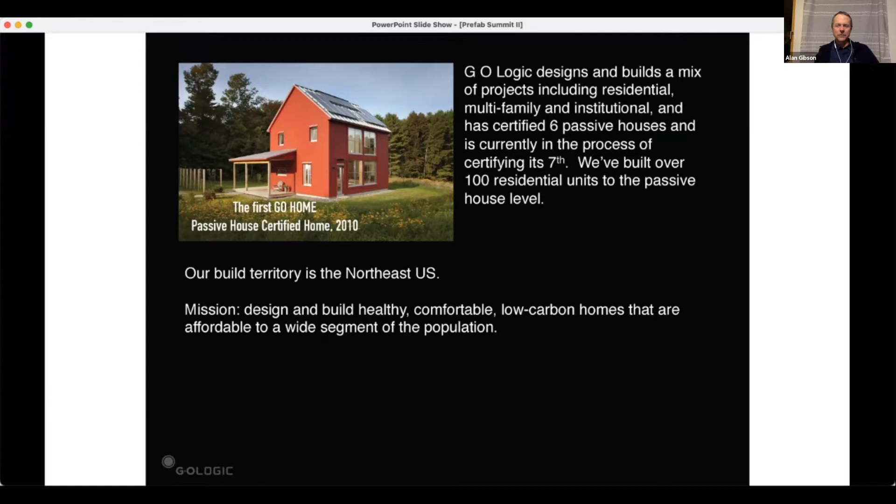I'm Alan Gibson. I'm owner of GO Logic LLC. We're a 25-person design build company based in Maine. Next slide, please. I'm going to go pretty quick, Zach. I don't have much time. So we've been around for a while. This is our first house, the GO Home, back in 2010. That was Passive House certified. And we started our business at that time and basically founded it on doing all Passive House all the time. Our build territory is the Northeast US. We are general contractors. So in Southern Maine, we will general contract projects. Outside of that area, we will design and then deliver a shell package for others to finish.

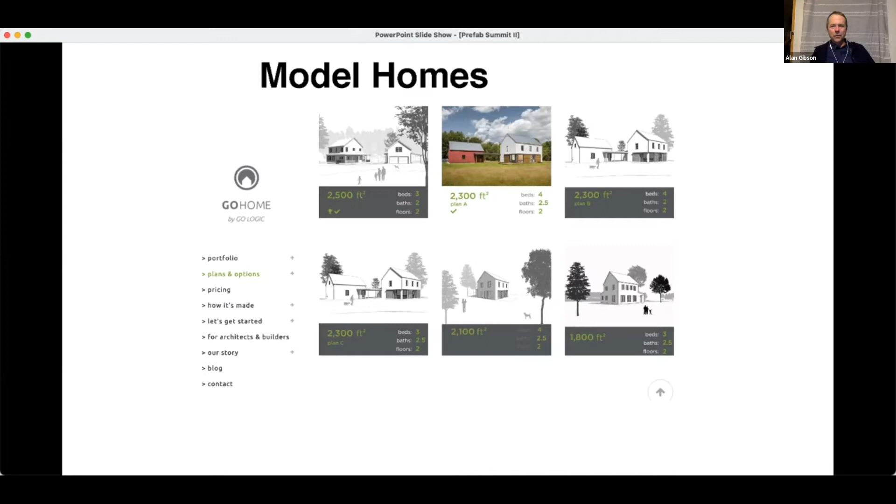Our mission is to design and build healthy, comfortable, low carbon homes that are affordable to a wide segment of the population. Next, please. I'm not going to claim that we're an affordable home builder. We do a mix of projects. We do some higher end custom homes. We've done some institutional work, but our bread and butter is single family homes. Next, please. And to try to crack some of the affordability nut for Passive House, we developed the GO Home, which is a series of pre-designed homes. Next, please. With models ranging from 600 to 2,500 square feet. We've built most of these multiple times. The design process is much more streamlined because they're pre-designed and we allow some customizations, but it allows the whole process to be more streamlined and therefore less expensive.

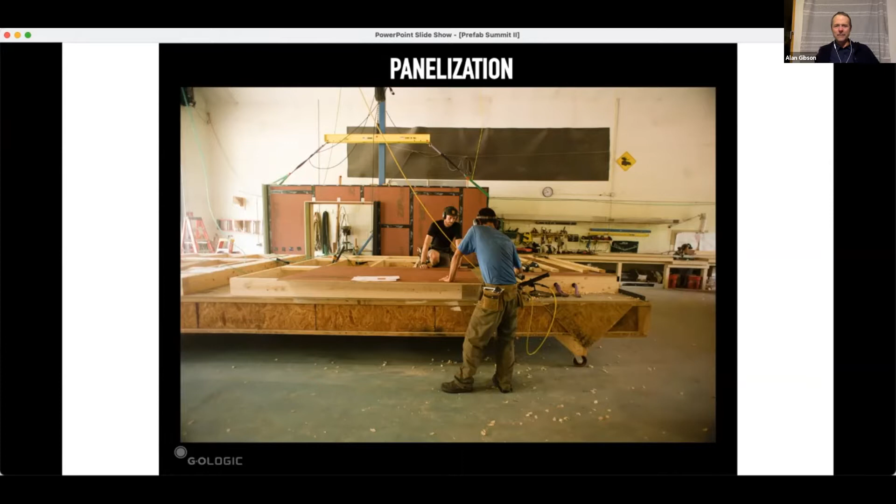Next, please. So here's a shot of our crew in our facility. We're watching a slideshow about Swedish prefabrication. We draw a lot of inspiration and information from them. And we've been panelizing in earnest for about 3 years now and really trying to go up that learning curve and figure out how to do it kind of from scratch, taking our experience being site builders into the shop. Next, please. My crew has really been figuring this out. Here's our space. It is not high tech. We have built it pretty organically for pretty low investment. We have some lifting equipment. We have an automated SawStop. We have a lull and a little overhead gantry. That's about it. So really, this is something that anybody could start doing. And I encourage that because I think the benefits are so great. Next slide, please.

Taking it from outside to inside, there are just great benefits. You're building not in the mud, in the rain. Therefore, you can concentrate better on what you're doing. We have a higher quality product.

The thing about panelization that's different is that you have to do most of your thinking before you cut your first stick. So there's a lot more pre-planning, and the shop drawing process is really important. That's another thing we've been working out, going from the architecture to 3D modeling and then shop drawings.

We put absolutely as much as we can in the panel in the shop to make it a value-added product. We install windows and doors, air seal them, flash, and put trim on them. We add a lot of exterior insulation.

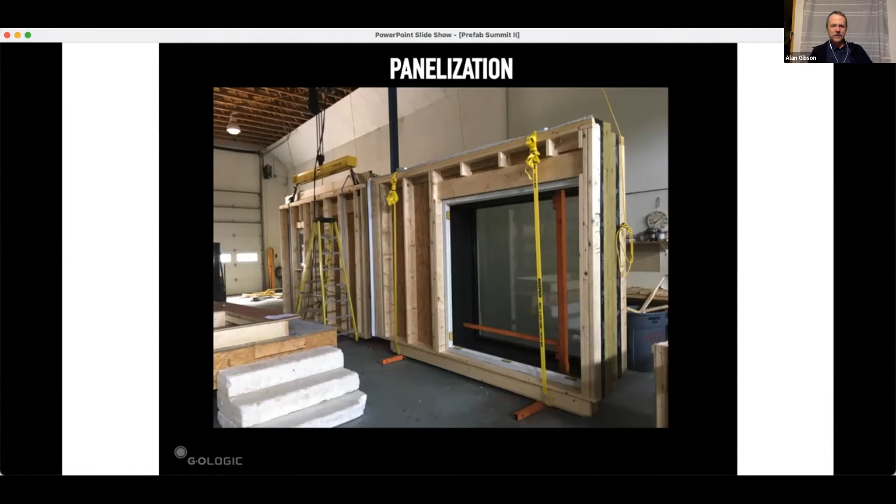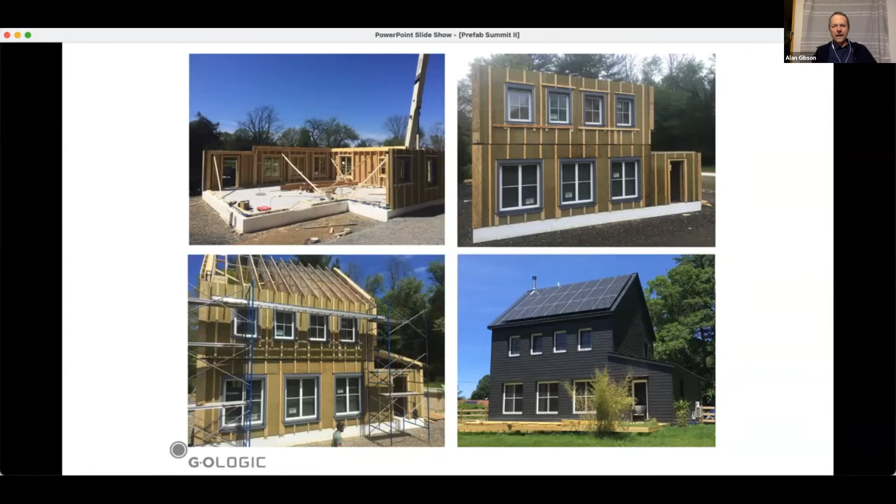Here's a typical build. This was out of state, so a local GC did the foundation. We came in with wall panels, floor panels, and roof structure. We made an airtight, watertight shell, and then passed it on to the local builder who did the exterior finishes. Here's our typical wall.

It's a 2x8 stud wall with cellulose. There's a sheathing layer, that's the airtight layer. This is showing mineral wool insulation in the drawing, but we've actually shifted away from that. Now we use rigid wood fiber with a WRB over that, and then a strapping layer.

About an R50 wall. Here it is in the flesh. We use gaskets to join the panels. When we're done with our shell installation, we verify airtightness with a blower door test. We meet the Passive House standard.

This is a fairly complicated thing. It's got a lot of layers, and it's all got to be right, or you're going to have a lot of mess on site. So that's really key to doing it successfully.

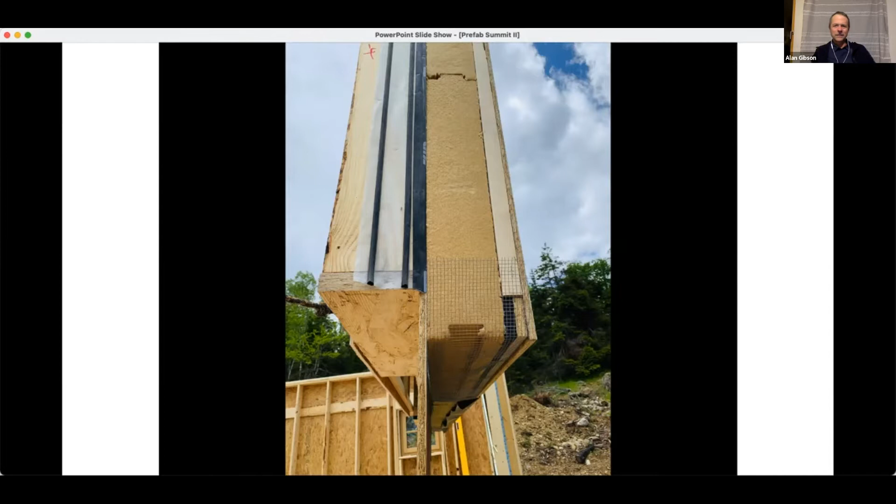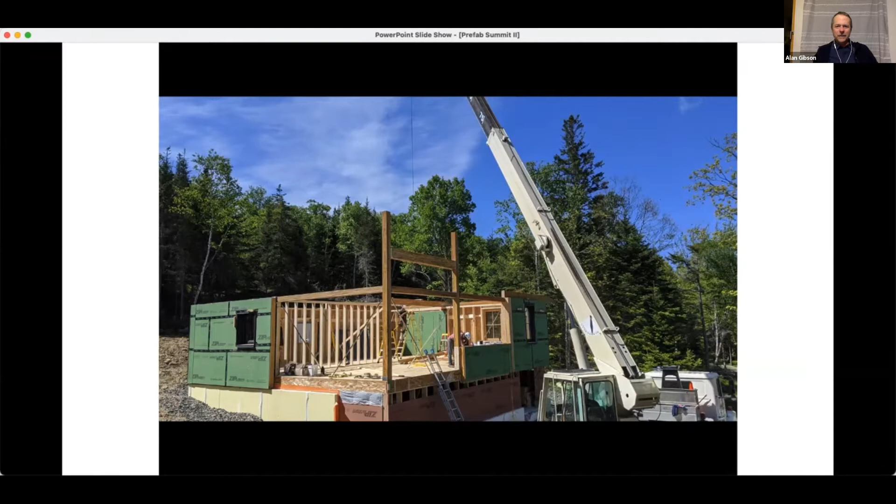This particular project had a second exterior skin because it was getting cedar shingle siding. This is an installation we did on a remote island in Maine, where the logistics were a nightmare, but the crew did a great job getting the panels in there and then flying them in to install them.

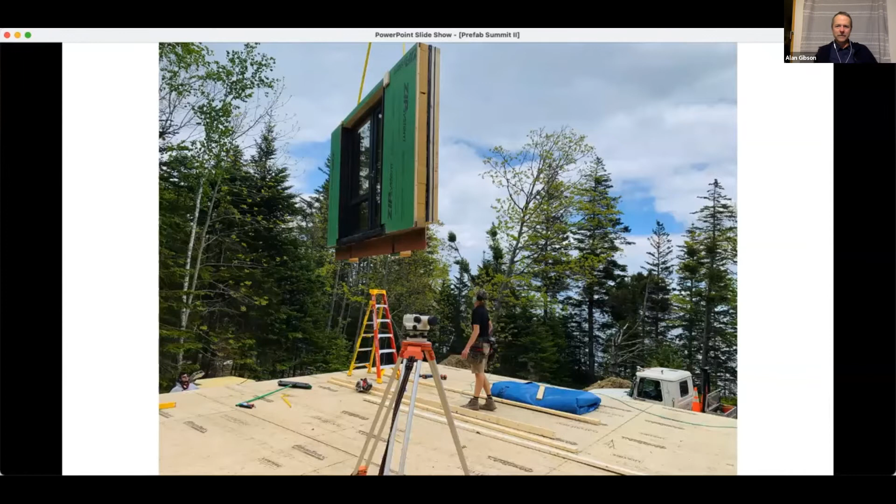One interesting thing about this project: you can see we put in as many windows as we could into panels, but there are some big expanses of glass that we couldn't build, they were too big to put in a panel. So we're happy to do that, it's fine, but you should understand that it's going to take more time and therefore be more expensive when you can't do everything in a panel.

The last thing I wanted to mention is panelized deep energy retrofits, which is something we want to get into. We did a feasibility study for this building, a low-income housing triple-decker apartment building in Lewiston, Maine.

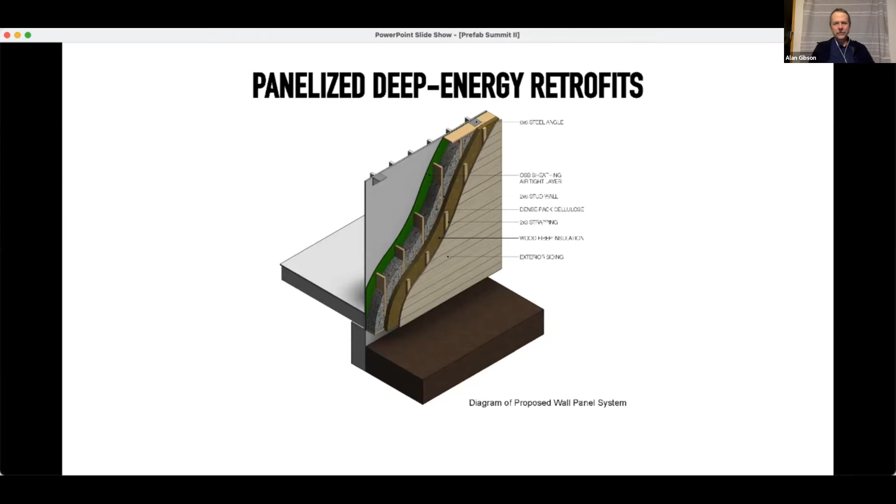We developed a potential wall panel that could skin the building and bring it to Passive House standard. We hope to do this project and more of these in the future, knowing that there's a huge need for this. So that's my time.

Excellent, and I love the detail of the connection process there, Alan. And again, even the scale of the problem. We might come back to that in the question period. So thank you very much.

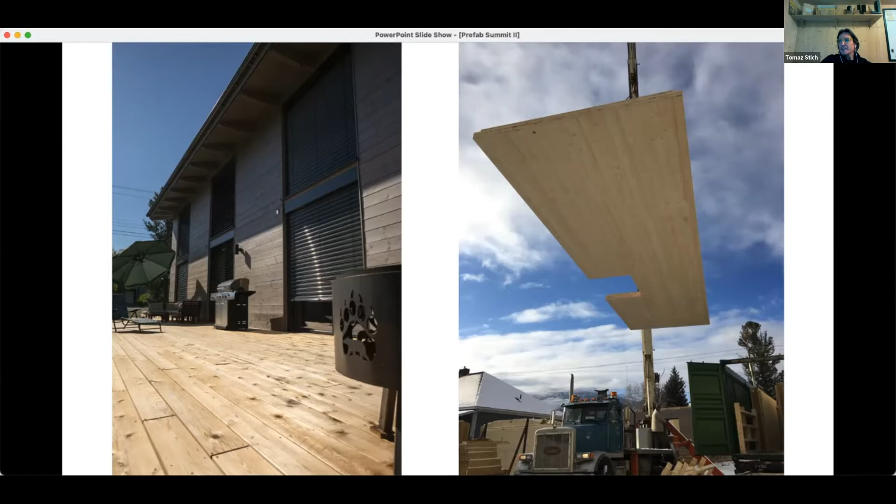So that's the inside, almost finished. As you can see, usually we focus on the exterior shell, but in our house, we used CLT as interior walls as well. So we never touched it again—we assembled it and never touched it again. So now no drywalling, no mudding, no painting.

And as I said, CLT's biggest advantage, I think, is it's your structure, it's your finish, it's your vapor retarder, it's your airtight layer, and you don't have to touch it anymore if you don't want to. And the structure is pretty simple—you can see the big drop beam in the middle. There are 2 posts, and it rests basically on 2 posts and the exterior walls. Next picture.

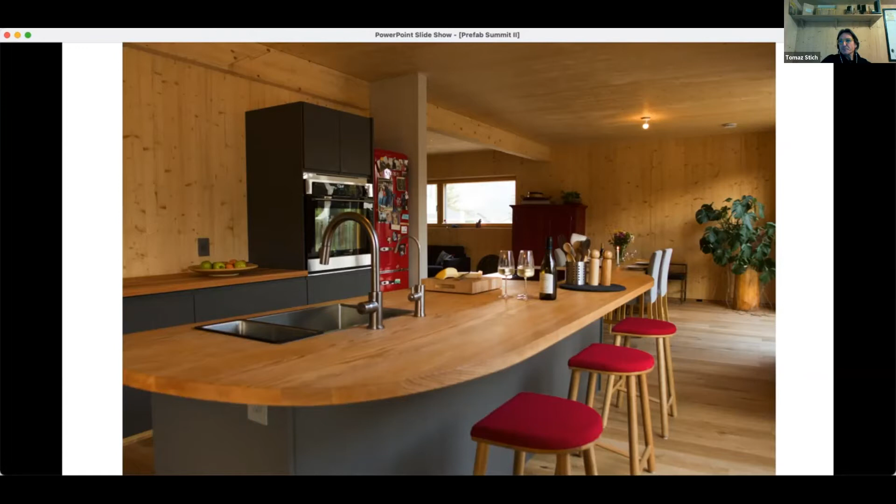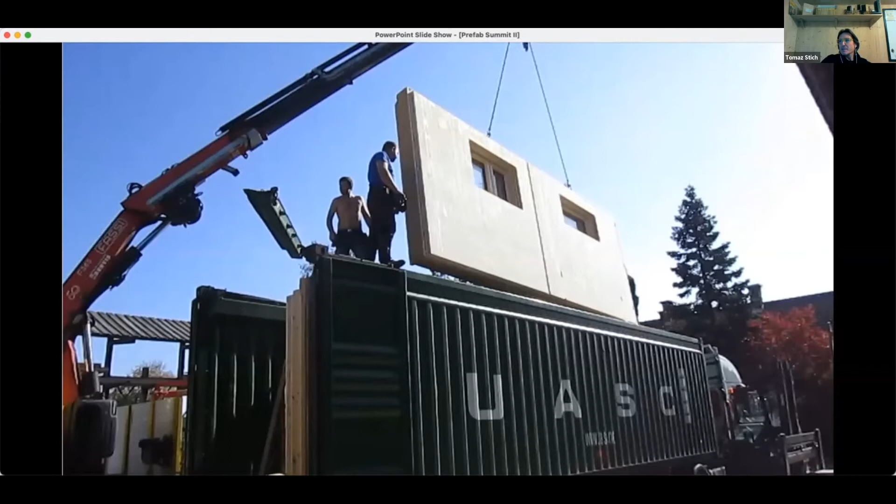Yeah, that's another pic from the inside. As I said, the wall that you see in the back is the east wall, so the window was built in, which you will see soon on a little time lapse. Window was built in, insulation was on. Okay, thank you.

This is Slovenia, where I'm originally from and where I have good friends that are carpenters and that have a shop. So I went over there last October and we loaded 4 containers in 2 days, basically, or 3 days.

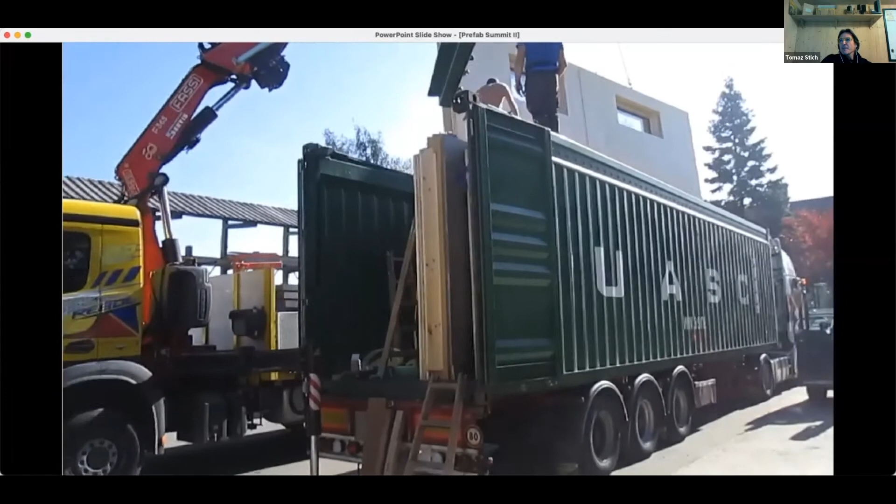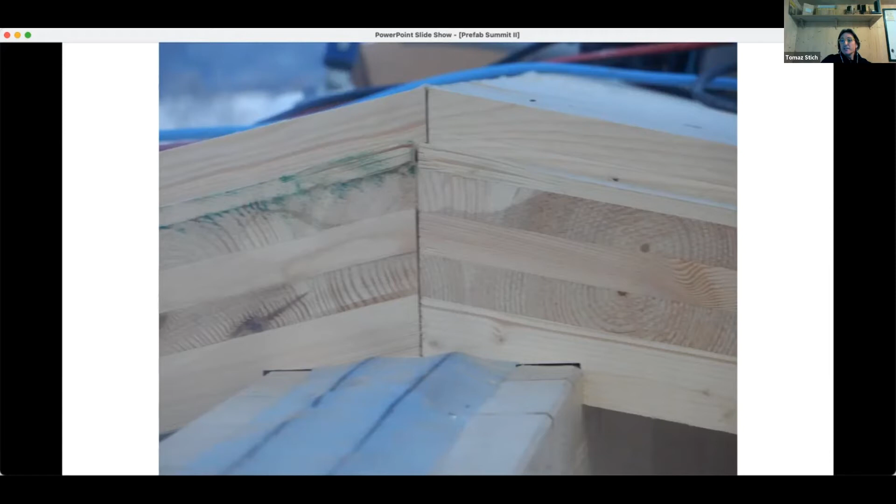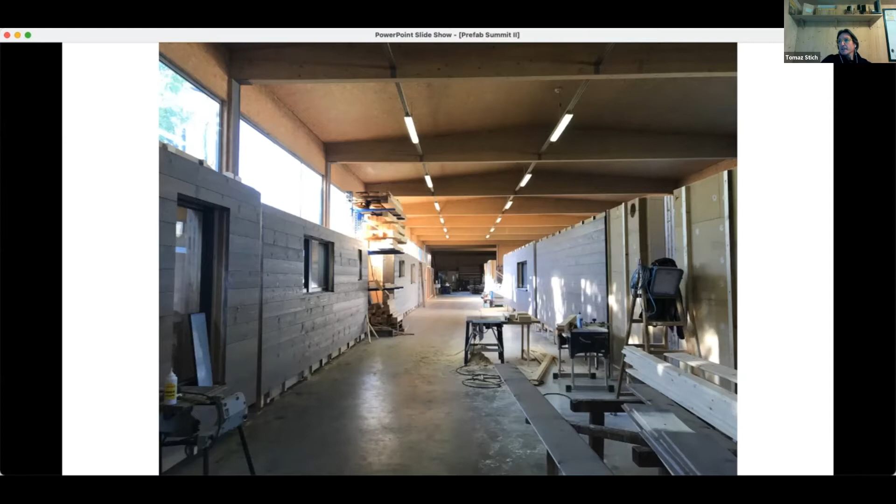Again, 5 days to lock up. Maybe next slide. So this is the shop in Europe, in Slovenia, with all the walls lined up, and you can see the siding. It's a pre-stained gray siding, solid wood fiberboard and strapping.

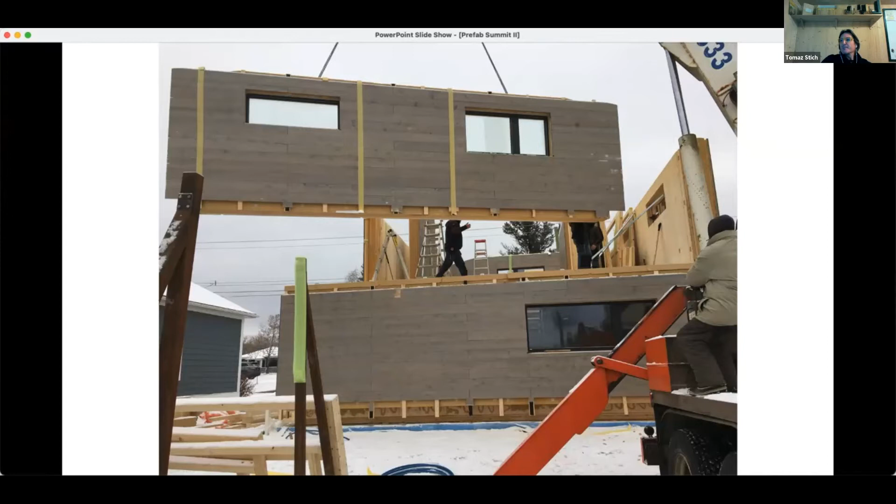So all the windows and doors were built in except the floor to ceiling windows on the south side, because obviously there was no wall to build them in. Yeah, that's one, that's the east side, upper floor, east side wall. Windows built in, siding on. The only thing we had to do later was attach the joints, the siding, which was delivered with the package.

Unfortunately, or fortunately, we didn't assemble the prefabricated roof panels, just because of size and volume. We had cantilevered glulam rafters. So this is how it looked for another month, unfortunately, on the roof before we put down the solid wood fiberboard insulation and the roofing. Yeah, I think that was the last picture.

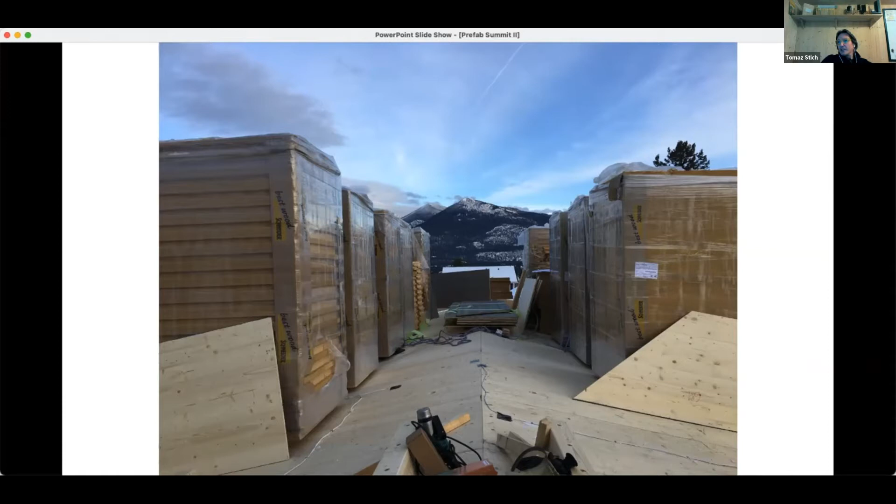Is there one more, Zach? No, that was the last one. Yeah, so thank you, Tomaz.

We started 10th of December and moved in May. We are pretty much done. Everything works, except, as you can imagine, baseboards and the huge... but everything works and we are pretty happy. So we're hitting minus 15 degrees now and it's good.

We don't manufacture anything ourselves. We use different suppliers from Europe for CLT so far. I hope there will be more suppliers in North America that we can use. Other than that, we plan design to a high level and we can push the limits with windows built in.

That's from me, thank you. Thanks, Tomaz, beautiful stuff. Love the detail, the gaskets, and even the CLT, how tight it was there. That's fantastic stuff. I'm sure there'll be some more questions for you afterwards. I saw them in the chat building up.

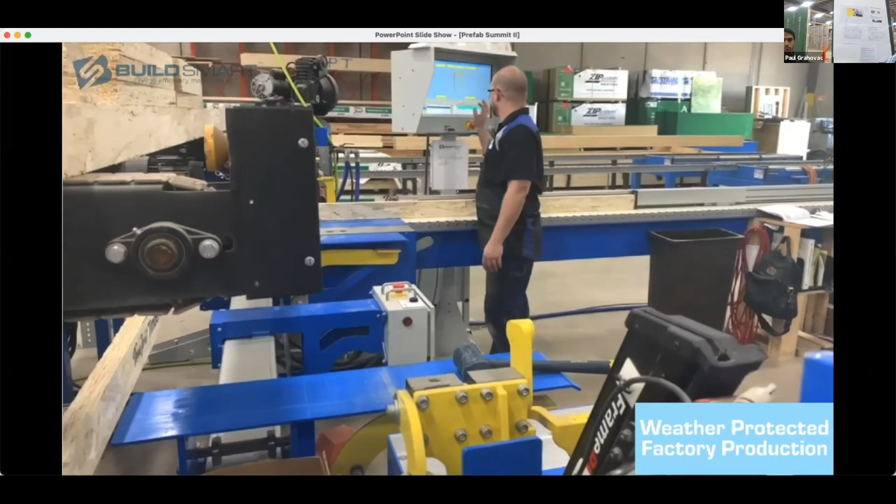Hey, listen, the way we are building right now with the Buildsmart system is beautiful. I don't think we will ever consider any other way of building. The way it goes up, the way it goes together, the way it's tight, the energy qualities of it — it's the best system I've ever seen in my life.

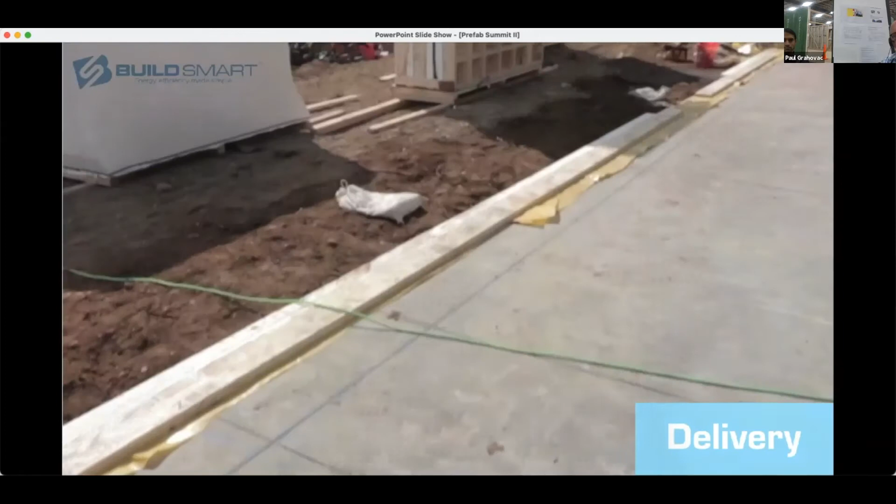A lot of trainees had never touched construction before. There were things we had to do from the grading and everything, making sure it's level because of the components and the way it comes together like a big jigsaw puzzle. You are able to take less skilled individuals, bring them to the site, show them what needs to be done, and with the repetition of doing it one after another, you can assemble a larger project with less difficulty than you would if you were doing full stick-built conventional construction.

Paul, did you have a few more things to say about your amazing company? Yeah, last time Sean mentioned that the point of Passive House Accelerator is to make the economic pie larger for all of us. And I have some information that should be able to show on the screen, but it's not coming through, so I'll just talk through it.

I've given this paper at about a dozen conferences across the U.S. and maybe 2 or 3 times that for AIA presentations. I'll supply anybody who wants a copy of it. Basically it's a financial analysis for prefabrication and multifamily, applicable to anybody doing prefabrication, multifamily, passive house.

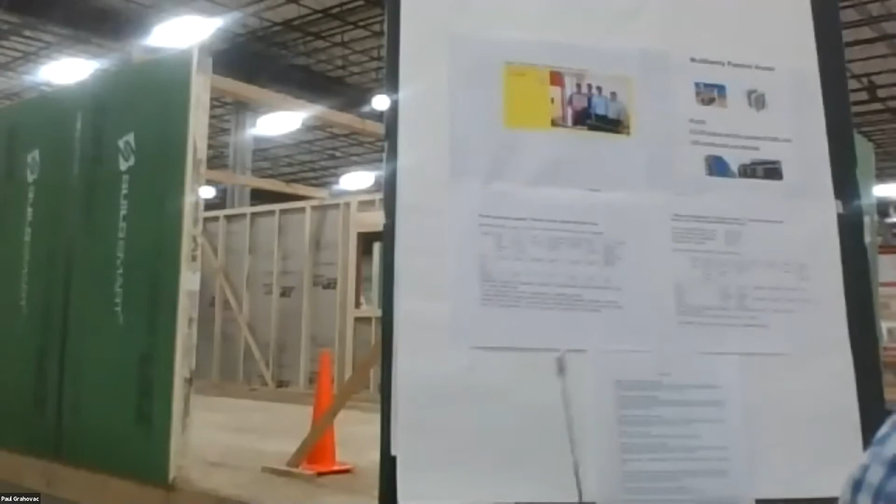Essentially, you end up at the end of the process — this is all backed up with articles and such, I didn't make it up — basically showing that you're spending 4.8% less for a passive house apartment building prefabricated than if you stick-built it to code, and you're making 60% more cash flow on the operation of the building. So I'll just leave it at that. Anybody want a copy of the paper, just let me know.

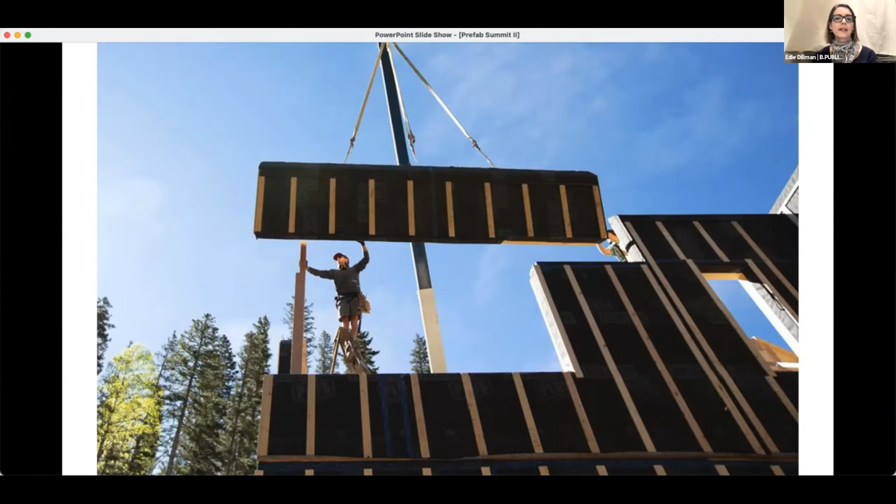So this is going to be a brief presentation just about our fundamental beliefs and what we're working on in this new venture. We're all about removing barriers, or at least limiting them, to making great decisions and moving towards high performance buildings.

A perfect example of this is contractors. They're our heroes. We are here supporting local builders to build faster, to increase finished projects every year, and a simplified path to performance, working with builders in partnership with either our licensed home plans or the plans that they have or their clients have.

We're working to decrease barriers in the design exploration. We provide tools for architects and designers to play with B.Public components from day one, offering related application details and options to allow for more open exploration for all size projects. It means we support and collaborate with professionals with ongoing envelope modeling and technical assistance from schematic design all the way through a project.

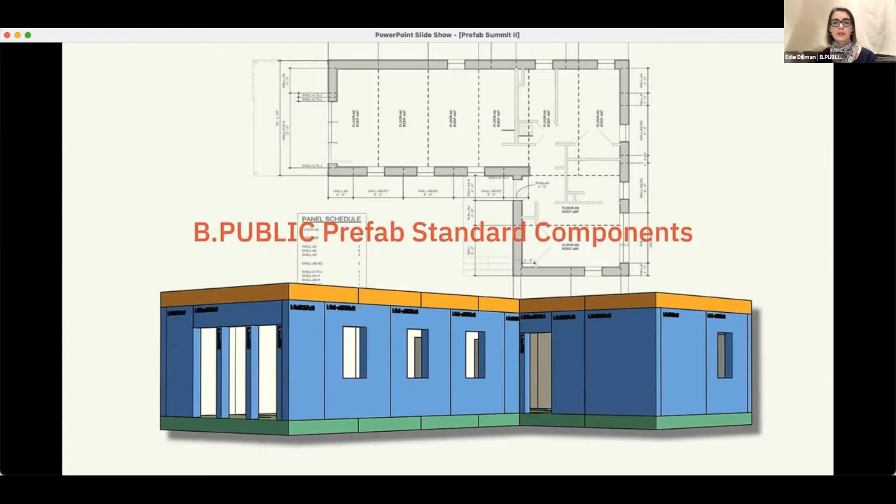Reducing barriers around cost. Cost predictability is really something that we are focused on. We are a component-based company with a component-based pricing model, so it is for iterative design and decision-making. We're estimating early, and often, through the planning process and all the way through the development of a project.

So tools for communicating to the client, to the builder, to partners around high performance. You can see in this example models of projects under design development, and these go along with our estimates so that there's always a visual and an understanding of what that building envelope is when we provide costs.

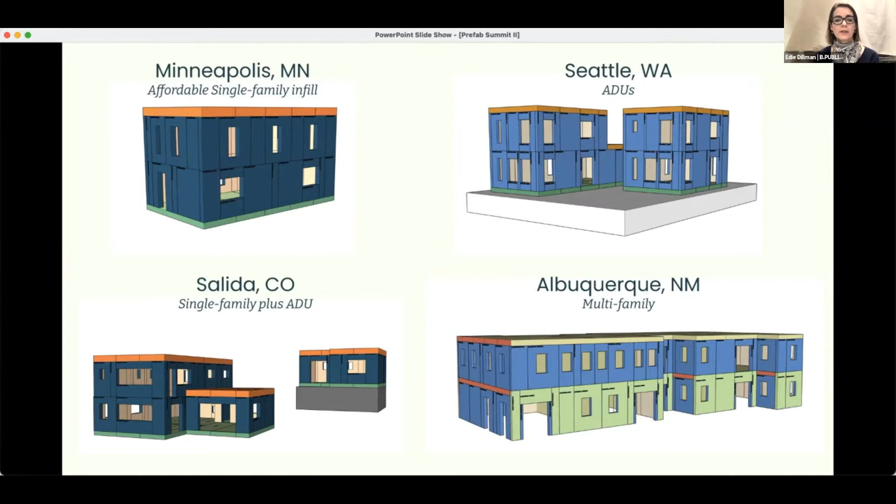We're also looking at the hidden savings and efficiencies in designing with standardized panels. You can see with our model, our flat roof panels at that 10-foot interior ceiling height may not be for every project, but it clearly offers a faster, efficient path for many projects.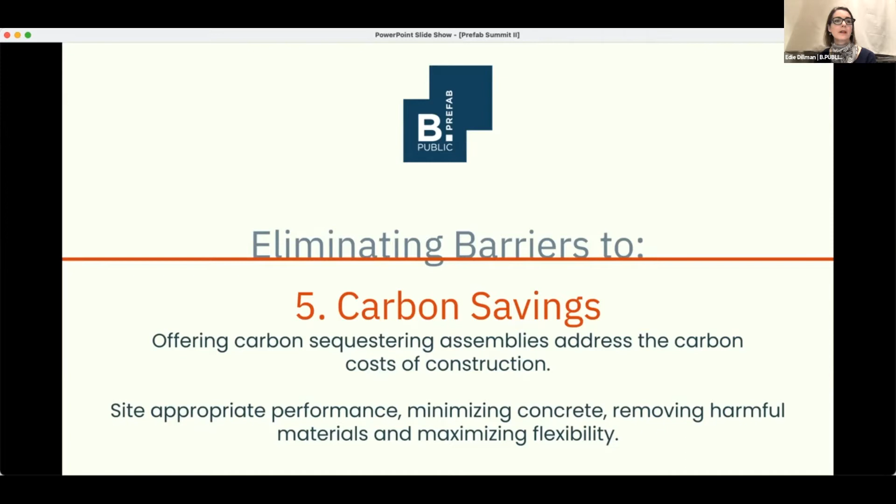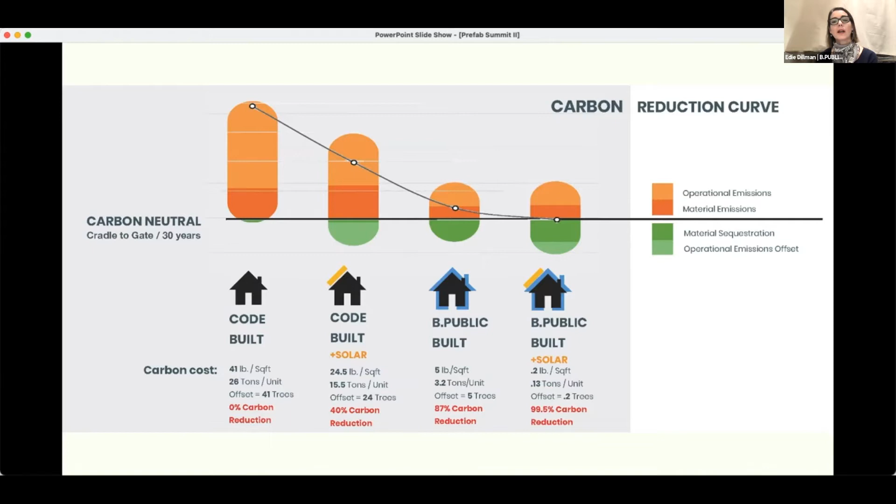Eliminating barriers to carbon savings, or around our carbon footprint. Passive House gives us a path to operational carbon savings, but we must also address the embodied carbon as well, and we do so by offering carbon sequestering assemblies. This graph is from a multifamily development we're working on now, and it really outlines the balance when we pair carbon sequestering and operational carbon footprint.

And our last point about barriers, although there are many more that we're addressing at B.Public, the ones we've talked about - what does it mean when we remove barriers? It means that we are a positive disruption in the marketplace.

So B.Public, we have standardized a predictable Lego-like system. We also license our beautiful home plans. We design and sell our panelized building envelopes. And importantly, we support architects, designers, builders, and developers to work with our panels and prioritize better buildings and decision-making. We work in very creative ways to remove these barriers, and we have built this company to put quality and craftsmanship at the forefront, and predictability of comfort, cost, and carbon savings available to the public.

Thank you so much. I look forward to Q&A afterwards.

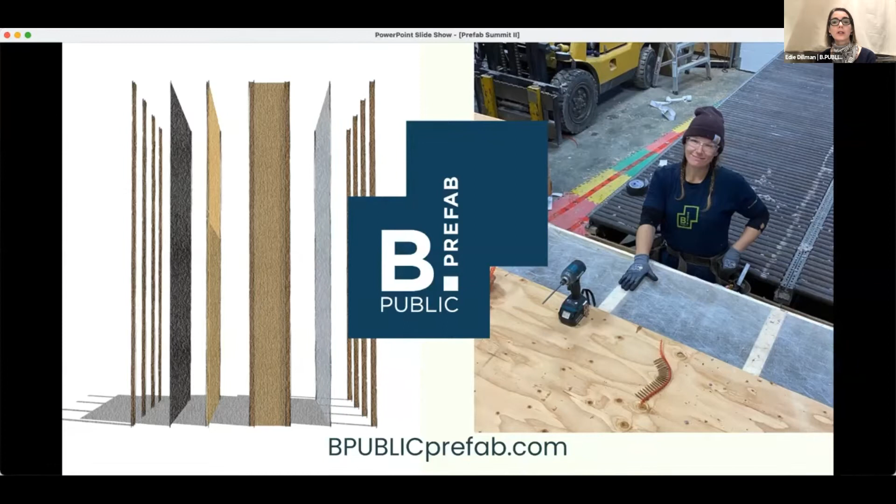Hey guys, yeah, I'm David, one of the co-founders of TAG Panels. We're based in Squamish. I'm also an architect and a passive house designer, owner of Stark Architecture. TAG Panels, similar to some of the other panelists here, makes prefabricated sustainable building panels, enabling clients to meet high performance building goals. Our secret sauce, as we like to call it, is that we're co-founded by an architect, an engineer, and a contractor.

The build up - we've created three typical wall assemblies. It's a bit of a misnomer because we customize them to each job, but from the inside out, we're going for OSB or plywood as our air barrier and vapor retarder, blown cellulose in the timber stud cavity, wood fiber to the outside, a high performance WRB, and then the strapping is shipped with the strapping on top.

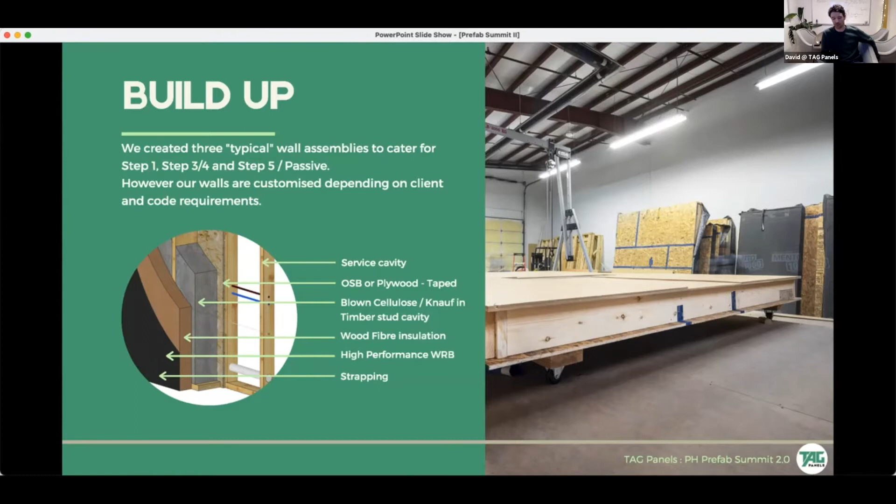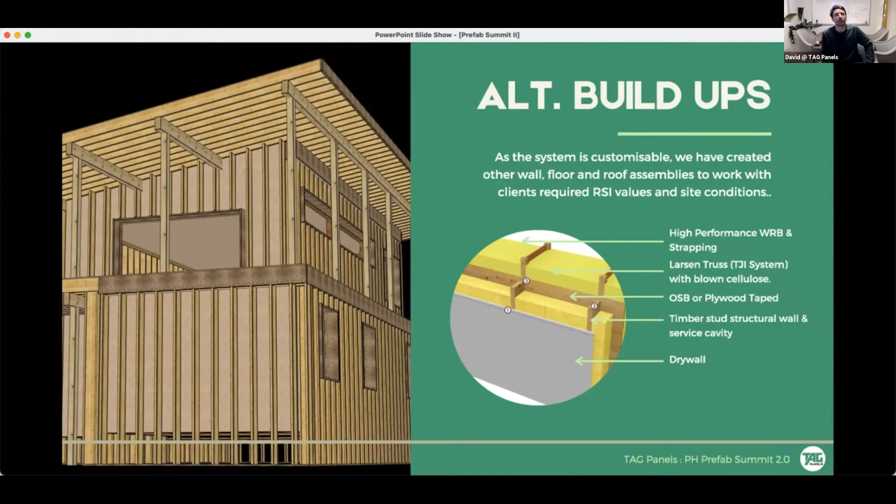We also do alternative build-ups. This was a Larsen Truss System project that we did. We've had some experience with it, but we really believe the 2x stud wall is best for transport, simplicity, and cost.

This is a little shot of our current operation. We started in a 3,000 square foot shop and outgrew that within the first project. This is a 10,000 square foot shop. We've got a 3-ton gantry crane that runs 70 feet along the length of the shop, and we have 2 separate tables, so we can run 2 jobs at the same time, or more often, 1 twice as fast.

We actually bring the semi trucks back into the space, and the panels are loaded onto the trucks in reverse order, then shipped out as and when needed. We have a Krendl insulating blowing machine. We've got a total of 13 staff at the moment—designers, production, and an install crew—and we have an additional 15,000 square foot shop coming online this summer.

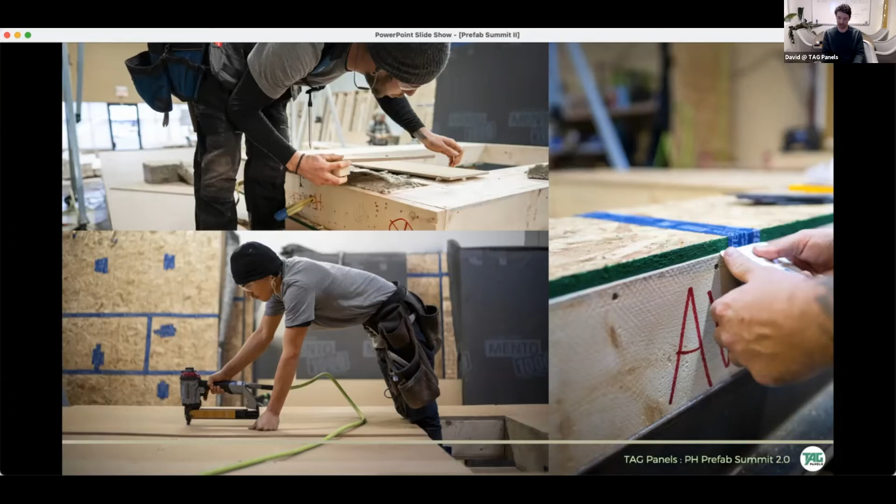Just some images of the guys installing. We're really big into care and precision, and it really helps when they're in a dry shop, which I'm sure you're all up to speed on now.

Our process, similar to others, starts with the needs first—typically from the architect or a thermal model—to work out our values and what we need for the envelope. We then move into the modeling stage using cadwork software, which takes about 2 to 4 weeks. We then do shop drawings, which take about a week.

It's quite troublesome getting architects and engineers to actually fully coordinate everything. They say they do, but they don't, and I can attest to that. Then we go into fabrication—approximately 20 days for a 4,000 square foot custom home. Installation varies between 10 and 20 days, depending on complexity.

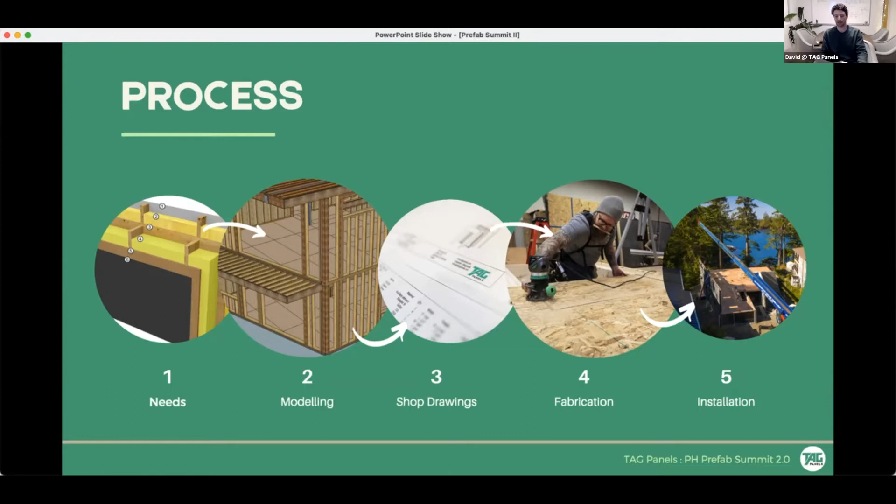Materials—we're big into carbon sequestering as well, so we've tried to build the panels so they have the wood fiber and the cellulose. We're experimenting with Knauf recycled glass. It's not as good for carbon sequestering, but it's also lighter, because some of these panels are getting really heavy when we're lifting them, since we're trying to shoot for larger panels.

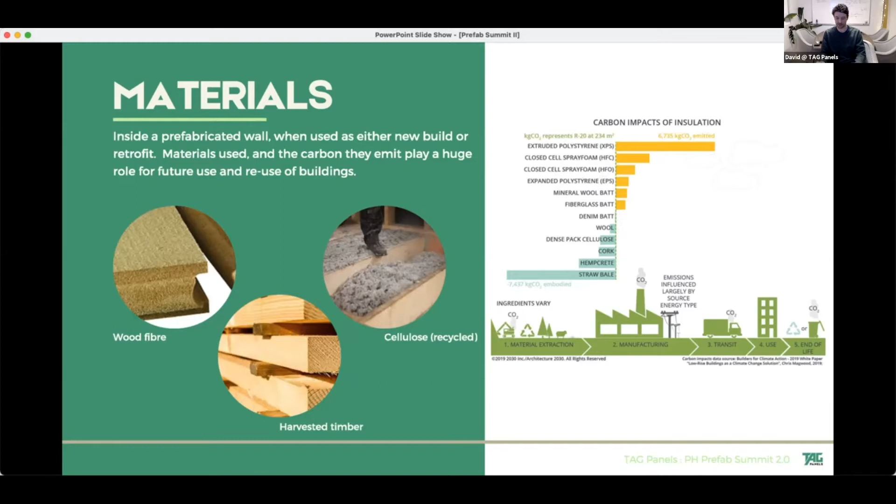Air barriers—similar to some of the other panels here, we're going for a multi-air barrier approach, but our primary air barrier is the taped OSB or plywood to the interior. The more the merrier when it comes to air barriers and tightness.

And then vapor diffusion, which was touched on before—these panels are vapor open, they're breathable. It would be interesting to talk afterwards, but we've had problems with local authorities trying to get their heads around vapor open assemblies and certain code requirements requiring specific perm ratings and materials. I'd be interested to see what other problems people have run into there, but we're facing some of those.

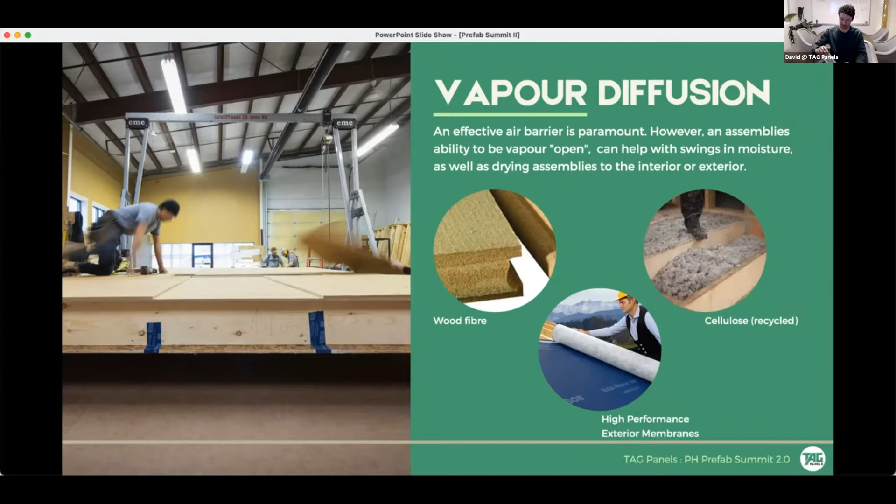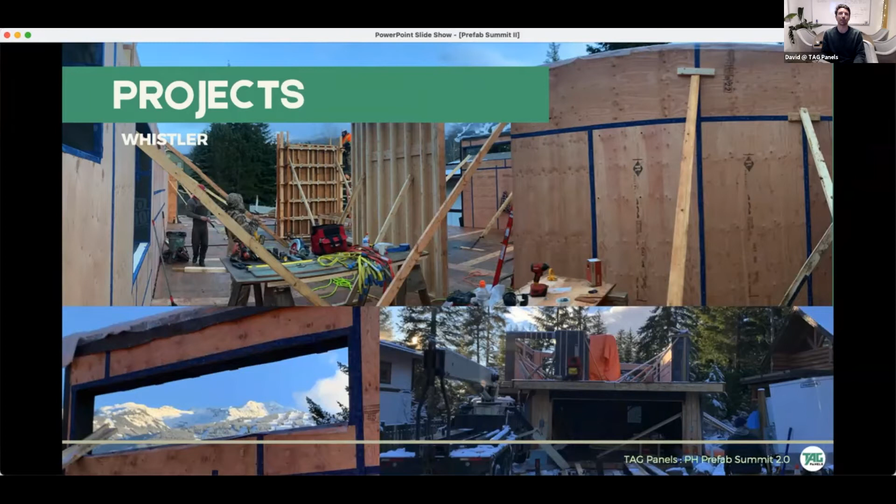I've just got a couple of projects. This one's currently being built in Whistler—it's a 6,500 square foot house. We did the walls, floors, and roofs here. It's all sloped roofs with sloped top walls, lots of steel, so quite a tricky build. This one has to be a step 4 house.

This is a house in Ucluelet, 4,000 square foot, on a very tricky site right by the ocean. This was primarily chosen because of the limited local trades. We teamed up with some local guys, but they just didn't have the volume of people to build a house this size, so the panels made a lot of sense.

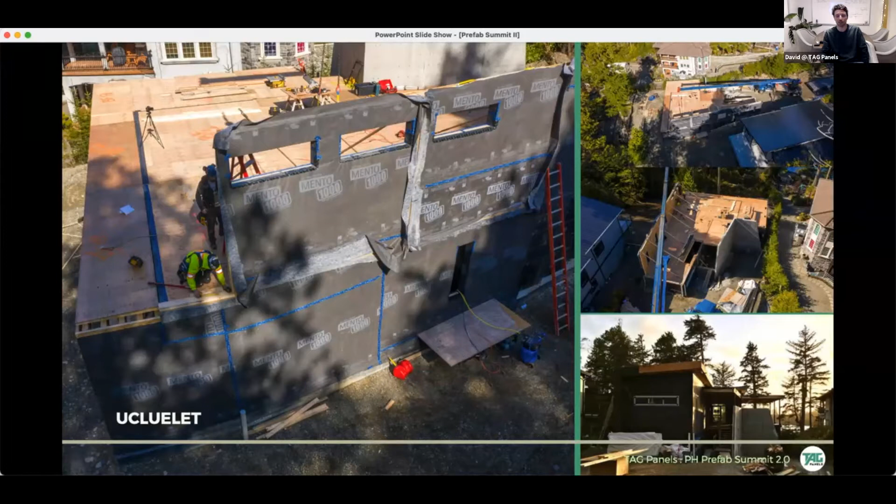Yeah, and upcoming, we've got the multifamily area as a big new market for us. We're seeing lots of people reaching out with 100, 150 unit multifamilies, and custom homes are great, but they come with their own quirks. And I think that the real power is going to be in these multifamilies doing those sorts of things. Yeah, I'm happy to jump in on questions on architectural or technical at the end.

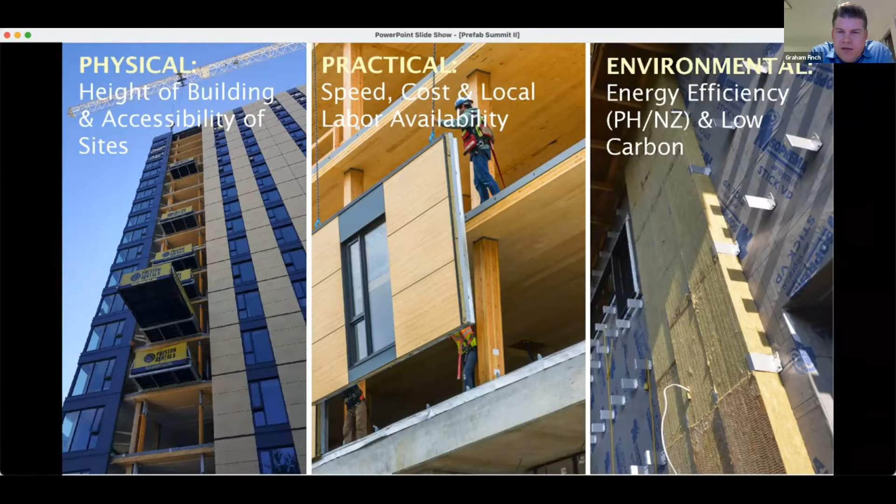And the last is environmental. We're seeing more and more levels of insulation, increased levels of air tightness, and low carbon, which is putting a lot of things in the same basket. And what it is, it's pushing us to be more creative to get some control on the systems, but also, it's a lot easier to install 10 inches of insulation on the ground indoors than it is on the side of a 30-story high-rise. Next.

The other catalyst we're seeing right now is mass timber, and mass timber is unique in that it's driving this even further. So when we're talking about doing prefabrication for high rises before, it was becoming a given. It isn't a given in many markets, but when you look at a mass timber building, which is driving a lot of this lately, it has to go fast for moisture protection, and also just the speed of the structure is quite quick, so you want to keep up with it. And so that's what's driving a lot of this change recently.

Next. Two things to consider: existing systems, we have small panels, things like window wall and small precasts that can be installed from small cranes. Things like curtain wall would be installed like this with small cranes off the slab edge of the building. Next. So very large panel systems. And so this is where a lot of the development is going with panel systems: we actually have walls with the windows integrated. Next.

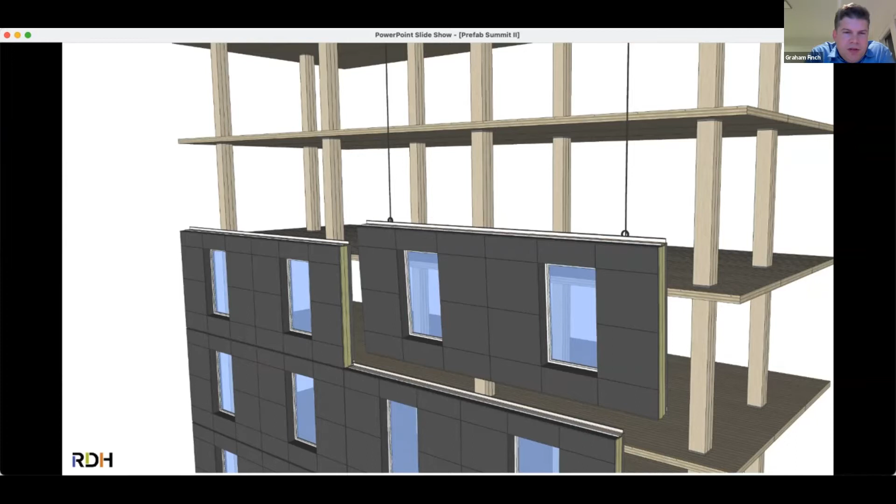There's a number of existing solutions already. This isn't new. Prefabrication's been around for a long time. We can prefabricate out of concrete. We can do it out of steel studs. We can do it out of curtain wall. And when we talk about passive house, it means pushing the envelope, so to speak, in terms of thermal performance. So it means thicker amounts of insulation, more exterior insulation with steel, thicker sandwich panels or more insulation in concrete, and higher performance curtain wall systems. Next.

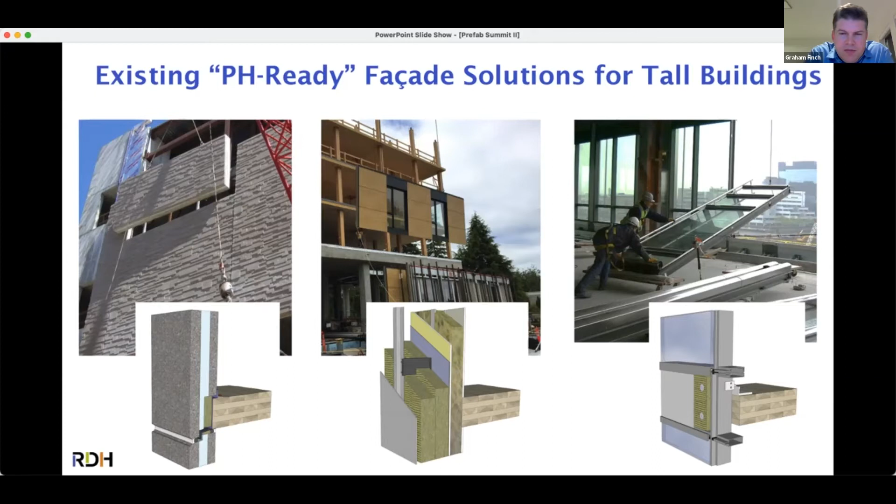There's a huge opportunity. We have a number of passive house projects in the city of Vancouver underway, and the only way they're going to be able to be built cost effectively is incorporating a fair amount of prefabrication. So right off the bat, looking at steel framed HSS frames with pre-installed windows, all exterior insulation to control thermal bridging. And then it's all about how you connect these together and what that looks like when it's connected. So doing very complicated passive house projects like the one on the left here. Next.

And where we're going next is actually into mass timber facades. There's been a lot of interest in bringing wood into larger and taller buildings with mass timber, and so we see mass timber structures going up all over the place. And what we're really pushing on the enclosure side is how we do the facade systems out of mass timber.

And we're looking at a couple of different approaches, whether it be a hung panel, like we see on the illustration here, which is essentially what we call curtain wood, which is like curtain wall, but hung wood. So very thin wood panels, whether it's CLT or mass plywood panel or other components, or load bearing. And when you look at hung systems, they're not part of the load bearing structure, but they're purely a facade element. Next.

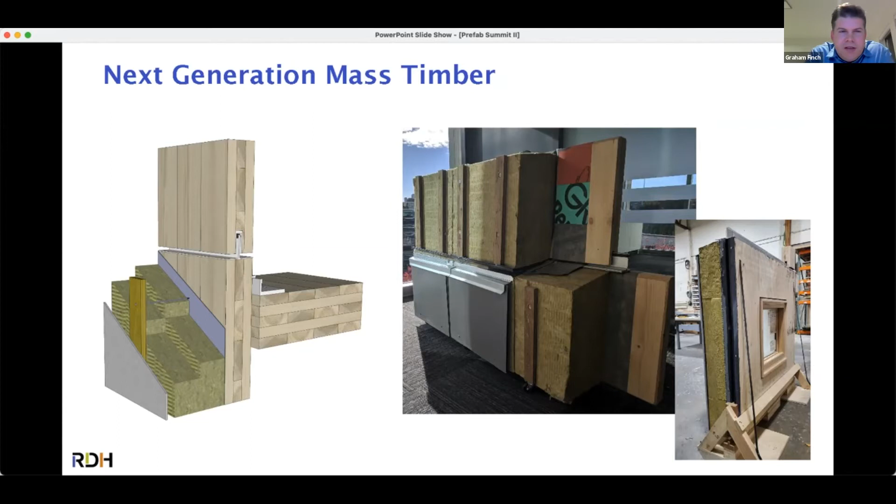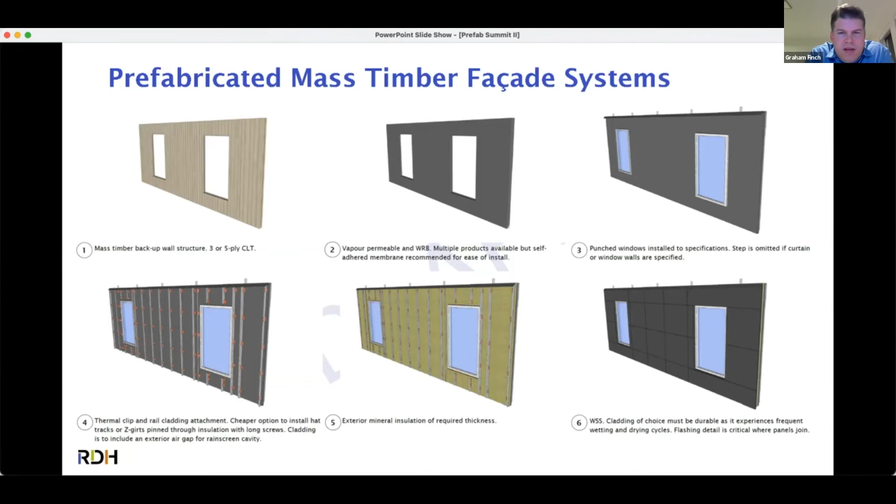And the way these systems are working is very similar to a lot of the technology we use in steel stud and precast: your wood panel, whether it be CLT or plywood or whatever component, large and strong, in factory installed air and water resistant barriers, typically vapor permeable membranes, whether sheet applied or fluid applied. Windows installed to meet the specs, exterior insulation, so you can leave the wood exposed on the inside, but also for durability. And then your cladding and your finishes and everything's on site. And all the trickery comes into the joints and details. Next.

There were some build slides there, but Catalyst in Spokane by Katerra, designed by Michael Green, was one of the first larger examples of this in the US. 2-story tall, 30 foot tall by about 8-foot panels that came together on site. The cladding and windows weren't pre-installed because the cladding was terracotta and the windows were too large to lay down flat and then tilt up. But it's the first example of that there. Next.

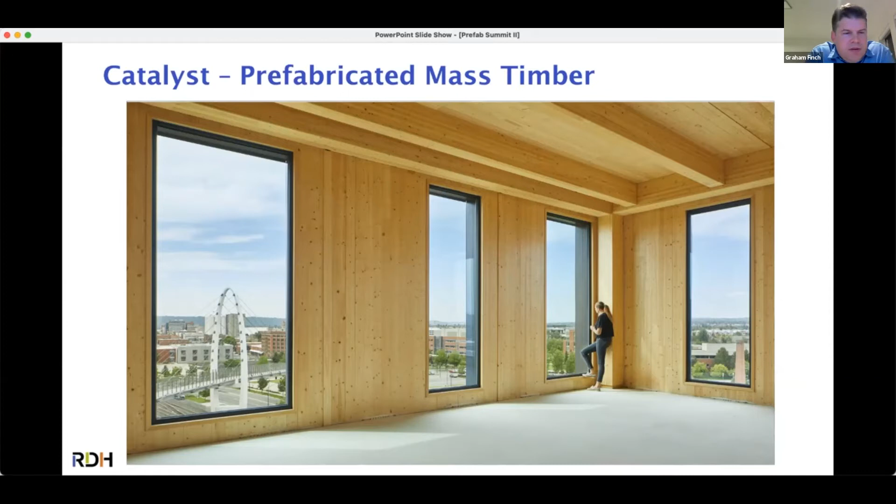And where we're going next, I'll talk a bit about this project. Canada's Earth Tower project is a proposed 30 to 40 story passive house mass timber project in Vancouver, British Columbia. The competition part of this project was for teams across Canada and the US, and I reached out to many people on the call, and we probably talked a few times. The idea was we needed a team to develop a mass timber facade for this project that would meet a passive house design spec for thermal insulation, air tightness, be cost effective, and meet all the fire and performance requirements for a high rise.

We had 6 teams from across Canada and the US enter the competition, 6 very strong concepts. 3 of those concepts went to the next phase, so the three sort of winning teams. And actually, in my eye, all 3 were completely viable options. We have mass timber with exterior insulation, partially exposed or fully exposed wood on the inside, windows pre-installed. Each of the teams had slightly different connections and details, but essentially that proved out that this could be done. And we have tons of projects we're looking at right now where we now have options. So we actually now have high-rise mass timber facade systems that are available in North America.

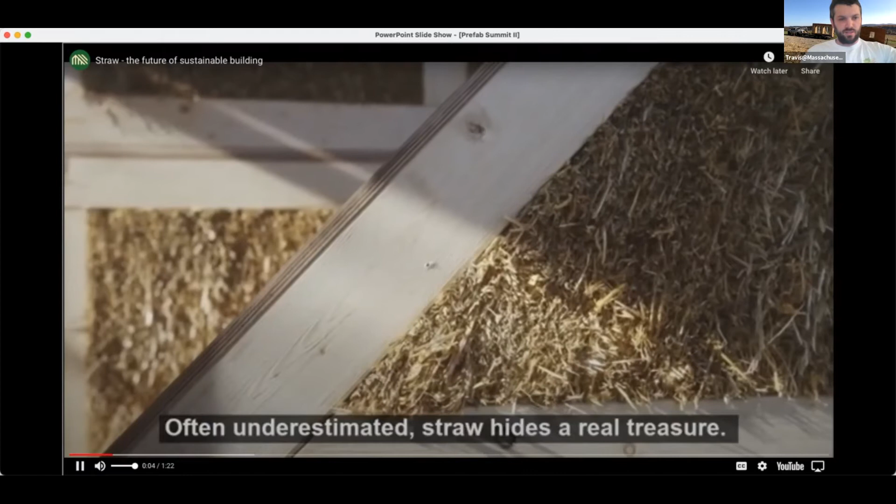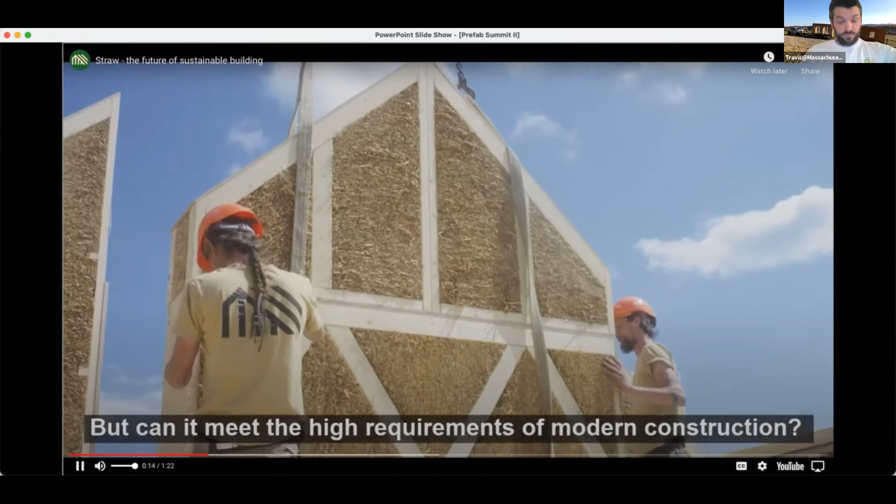Often underestimated, straw hides a real treasure. Its unique cellular structure, full of tiny air pockets, makes it a great insulation material. Straw has been used in construction for millennia, but can it meet the high requirements of modern construction? Our wall panels consist of 98% wood and straw in their natural state. We want to show how well-known natural materials can constitute the building blocks of any sustainable construction. The wooden frame provides structural support for buildings up to 6 stories high. The panels are filled with straw at very high pressure. This helps achieve excellent insulation properties.

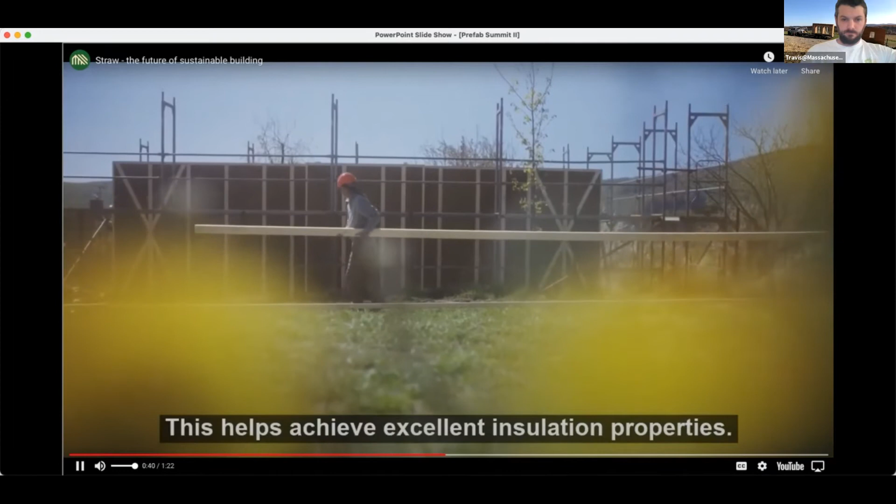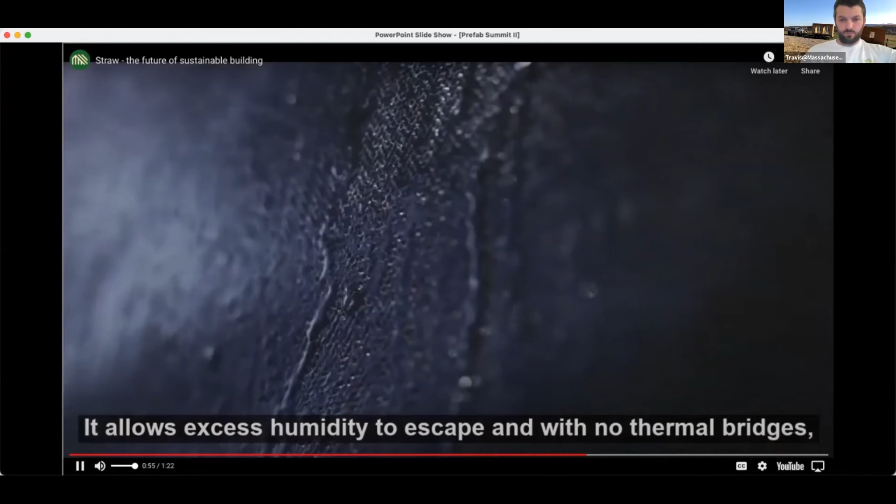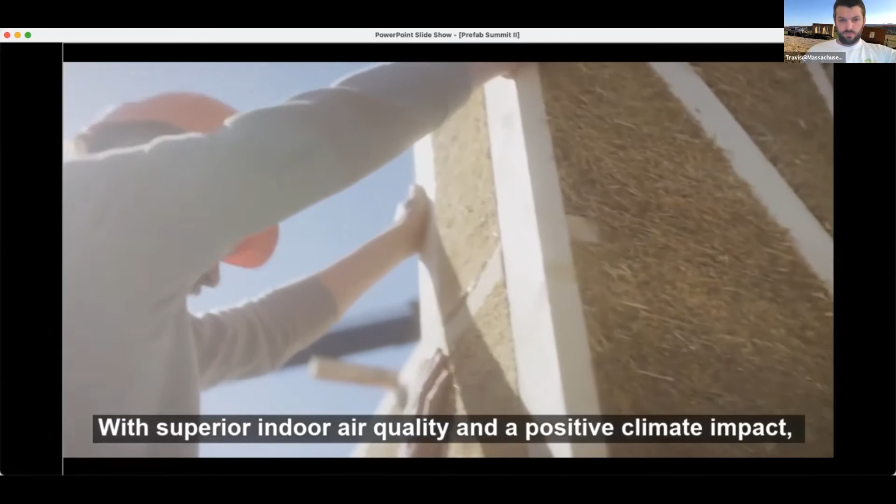Together with a wood fibre layer, an airtight membrane and an interior clay plaster, the system meets the strict requirements of the Passive House standard. The system is airtight but vapour permeable. It allows excess humidity to escape, and with no thermal bridges, it leaves no space for drafts or mould that is often present in modern sealed buildings. To accommodate any type of building design, the panels are made to measure for every project. With superior indoor air quality and a positive climate impact, EcoCocon provides a healthy and sustainable alternative to conventional construction.

All right, great, thank you so much. Yeah, so I guess we'll start with a little bit about the background. So after 15 years of passionately seeking and implementing the most sustainable building practices in various climates around the world, Peter Jensen, the director of our company, Build with Nature, has settled in upstate New York. But coming to the Catskill region is not an end to his journey, but a new beginning. He's originally from Denmark, but he's bringing big plans with his vision and hard-earned expertise to create new opportunities for the U.S. market.

Since reaching out to his colleagues and old friends at the Slovakian manufacturing company, EcoCocon, over a year ago, Jensen to offer their straw-based panels as a prefabricated option for builders and designers across the US and Canada. The EcoCocon product and building system has been based on rigorous testing, certifications, and hundreds of quality builds in 21 countries, and has grown through renown throughout the world since 2010.

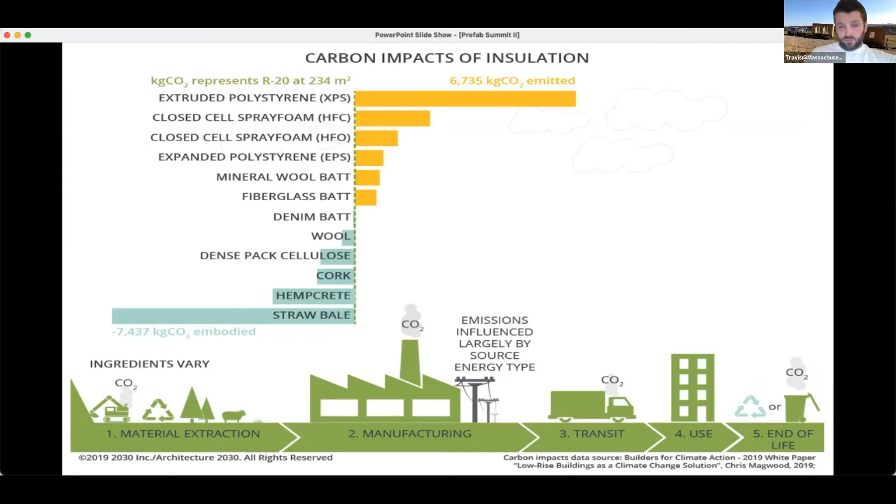Governments around the world have decided to achieve a carbon zero economy by 2050. And we are helping to make that a reality today by applying the absolute highest standards of Passive House design with renewable materials. With 10% of the straw grown in the US each year, we could build 1.3 million homes and store a vast amount of CO2 rather than release it to the atmosphere. So if you could switch that one more time, Zach.

So just a little bit more about the panels. This is really adaptable to any size. They're customizable dimensions down to a millimeter. It's very simple and quick assembly using basically just a screw gun. They're very flat and homogeneous surfaces. A panel, which is standard, just under 16 inches thick, gives you an R38.3. With the wood fiber layer that we typically use, a 2 1/4 or 2 3/8 inch wood fiber layer, that brings it to an R47.

As I said, the panels are highly CO2 positive, so we can justify for a certain period of time transporting them across the ocean, because they're currently manufactured in Europe. Because we've done some studies, and you'd need to truck over 3,730 miles to achieve a negative CO2 output.

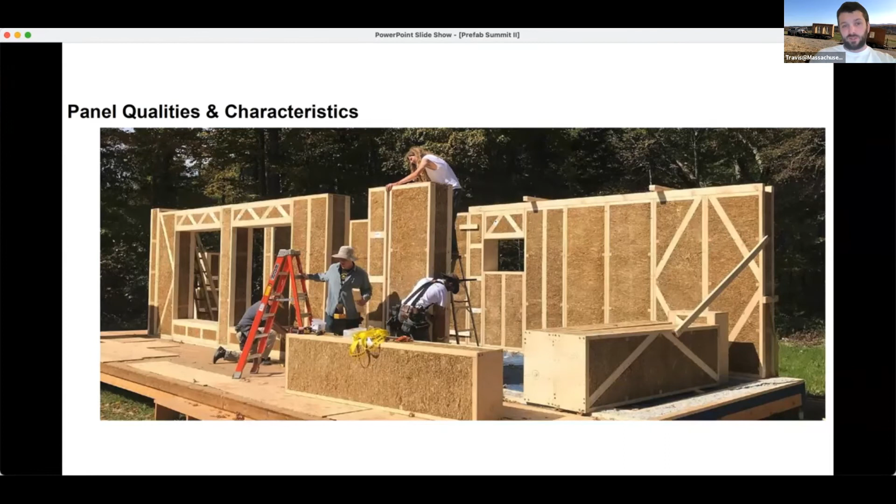That's about 165 pounds of CO2 sequestered per square meter in the panel, or 8 tons in an average house. Our goal is to bring these into the mainstream and have it as a viable option for designers and builders across the states, and eventually move toward manufacturing. It's a cradle-to-cradle certified product, a Passive House certified component, fire resisting tested, and seismic tested.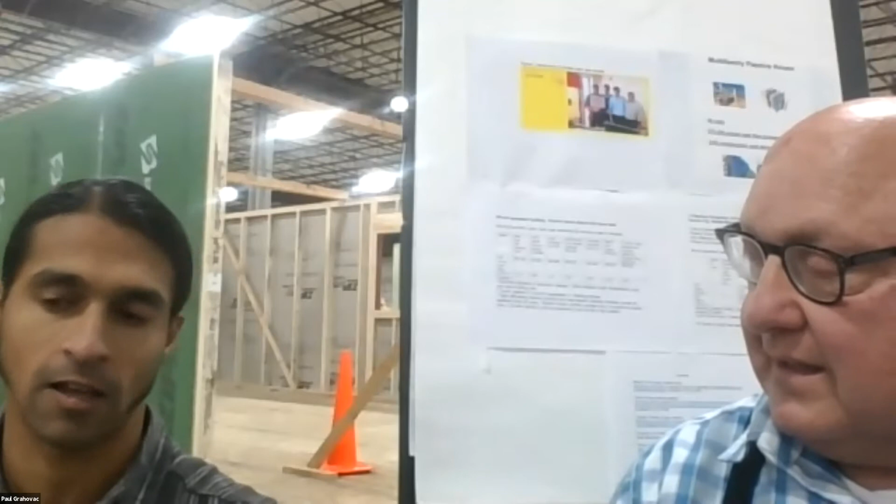Okay, so it's kind of a limitation of the machinery that's available to you guys to use. Yeah, that's why we've devised some of our own to get vertical.

Well, it seems vertical would be better for a number of reasons. I mean, I understand the fight against gravity - gravity tends to define a lot that we deal with - but the space savings, the ability to add fenestration... with glass, if it's vertical, it's actually the most stable. It just seems there are a tremendous amount of benefits. Well, yeah, we put our windows in on a vertical panel. Sure, yeah, I'm glad you mentioned that.

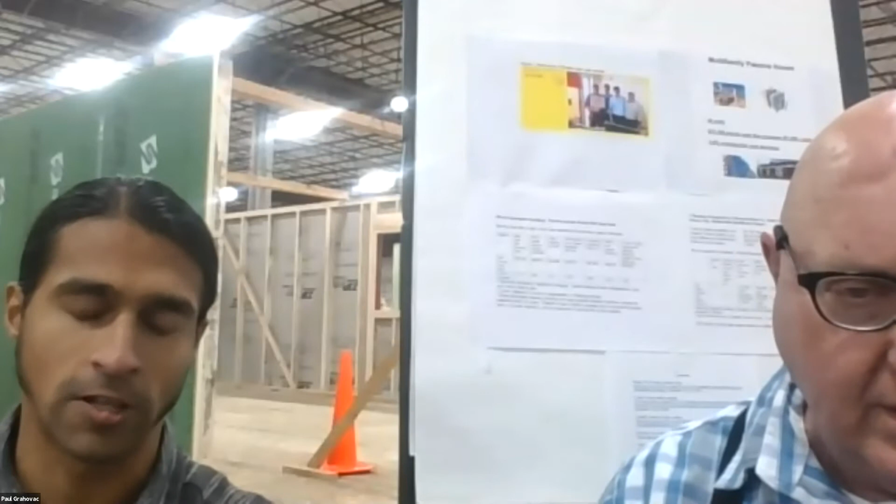So not everything happens vertically. There's a certain amount of the process that happens horizontal, and then it tilts up vertical for the remainder of the processes. So flashing happens vertically, window installation happens vertically. So you're absolutely right about that.

And can some of the other prefabricators sort of give us their perspectives on these things? Yeah, if Bill or Thomas, you're ready to go.

So our house was actually manufactured vertically, but that was mainly due to shop size and the layout of the shop. So they put the CLT panels into the shop vertically, applied the wood fiberboard vertically, starting obviously with the lowest row, and installed the windows. So it can be done, it can be done, yeah.

Again, it does depend on the factory. I don't know if Bill, if you're with us still, if you wanted to chime in, but I think you might agree with Paul when it comes down to manufacturing some of these machines. Bill left, but Martin is still here from Blueprint - thanks Martin. I agree with Paul, we do the same thing. The framing, the sheeting, the insulation is actually done horizontal, and then we turn into vertical, and that's where all the MEP and the window install and the flashing happens.

So it's gravity, it's also a limitation on the equipment, and also easier because we're not only framing 8-foot walls, we're framing 10, 12, 14-foot walls. And if you have different heights, your machines operate easier horizontally than vertically.